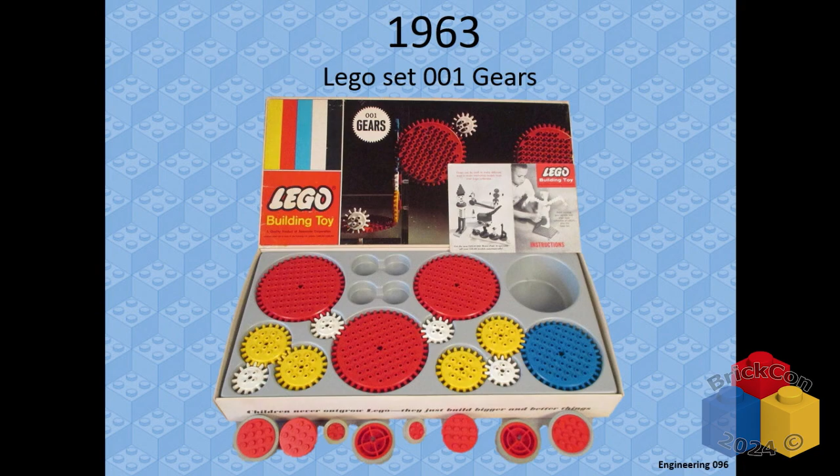Gears have been around in Lego form since '63. The big sprocket ones, those are kind of fun. And in '77, that's when Lego came out with what we now call Technic. That's when we got the 8-tooth, the 24-tooth, and the 40-tooth gear. More on those later, but they've been around since the '70s, okay?

Some of you have been around since the '70s. Yes, there we go, excellent. So I do remember when these kinds of things came out when I was a kid, and that was kind of cool.

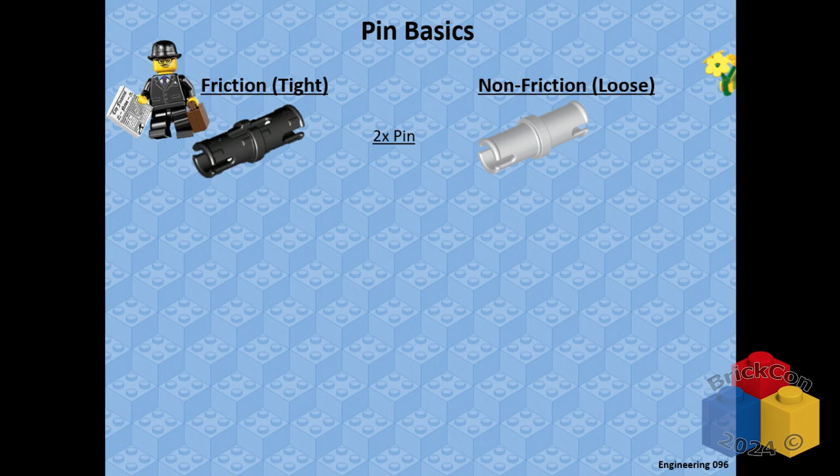So pin basics, real simple. If Technic is not your area, there's friction pins - they're a little bit tight-wound. And there's the non-friction pins, which are really kind of loosey-goosey. They are different. I didn't learn this till I was in my 40s - I always thought they were the same, just different colors.

Working with gears, the ones that are a little more helpful are the combination pins, where it's half axle, half pin. Sometimes you need to connect a gear to something, but only to the Technic beam. The non-friction tan ones are very convenient for that because they spin nice and loose. Sometimes you need to introduce a little more resistance in a mechanism, and the blue ones can be nice because they'll still attach to the gear, go into the pins or the beams with the pin connection, and have a little bit of resistance and friction. Just a little tip there.

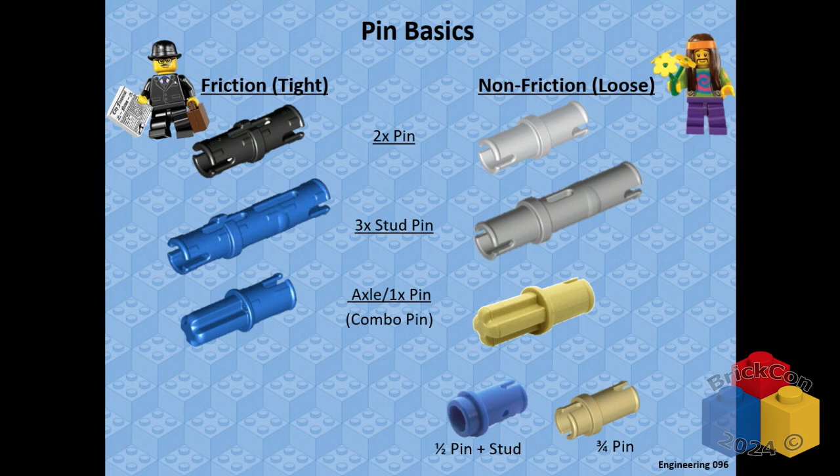There's more pin types if you don't know them, even more than this, but basically think of friction and non-friction. The friction ones are all black and blue. The non-friction ones are all tan and gray. They also have red and yellow that they're introducing, which is frustrating because I learned these colors, but they do still follow the friction non-friction rule.

In general, simple machines - this is the core alphabet of all mechanical engineering. If you don't know these 6 simple machines, find a resource to help understand them. Great YouTube videos out there, little tutorials and things. This is great for understanding how machines work. The basic concept is changing magnitude or direction of a force - make something go a different way, or at a different speed or force. There's lots of math you can do with these things, but that's not why we're here. So we're going to just focus on the fact that they're cute little things and they do stuff. Exactly, okay?

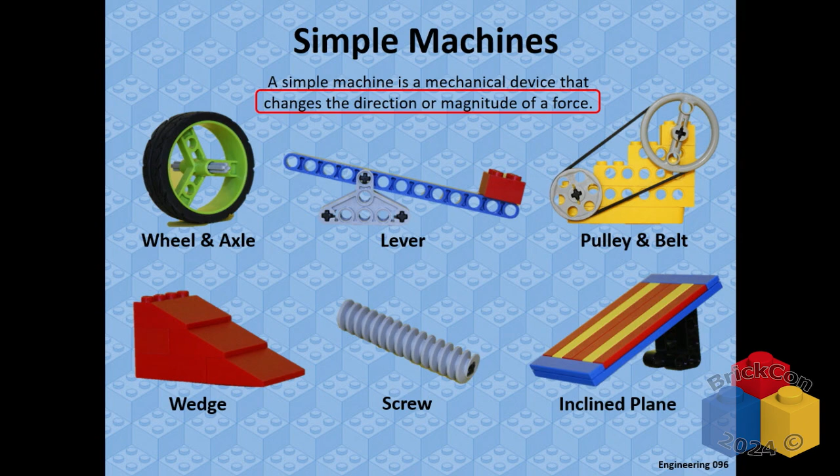So simple machines, get to know them. Maybe that's a talk for another day. Any kind of simple machines combined together make a more complex machine, like a gear. A gear is not a simple machine, it's more complex. It's got more functions in it, and we're going to use those to do stuff.

Okay? There you go. You just passed 096. On to 101. That's good.

All right, gear basics, just learning about gears. You never touched them before. You don't know what they are. You find them in the bulk bins. You're like, it's weird. Got to have a proper mesh.

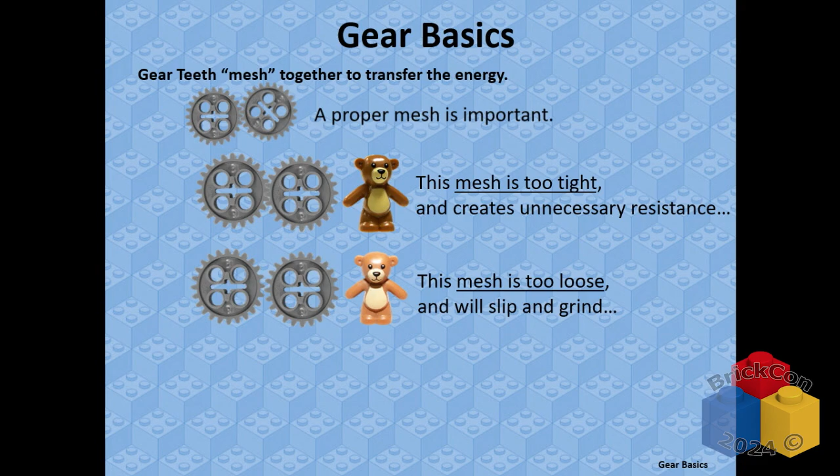When they mesh together, the teeth of the gears really need to fit properly. Can't tell you how much I see with, do you not fit properly sometimes? Does it not mesh right for you sometimes? Okay, I'm sorry, that's a personal issue. We'll talk about that later. It's okay. So make sure they're not too tight, make sure they're not too loose. They got to fit just right. That's kind of cool.

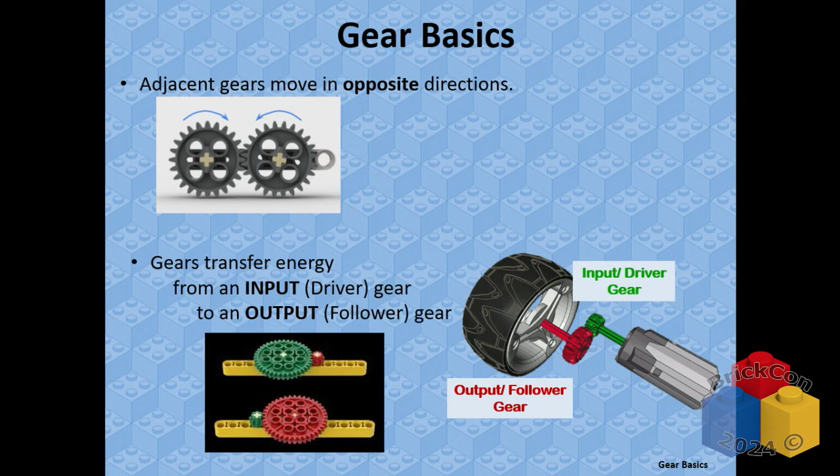So 2 gears working together turn in opposite directions. It seems pretty logical, but sometimes we forget that. You build a thing, you hook it up, you turn it on, it's like, why is it going backwards? Well, because you got 2 gears. Okay, that's okay. Maybe make the first one go the other way, and the other one will go the other way.

That's all right. Gears always have an input gear or a driver gear. That's where the thing is going in, you're starting the force there. It connects to an output gear where it's going off to do something else. Input and output, first, second, driver gear and follower gear. Different terms, but input, output. Easy enough, I hope. Okay.

Gear basics. Any time you want to put a gear between gears, you can do that. You still have an input, you still have an output, but you can put some gears between them. If you need to space them farther apart, maybe they're getting too comfy, or farther apart, those are called idler gears. The idler gears space things out. One idler gear will reverse the direction, so now the input and output will go the same direction. But if you put two idler gears, now they're going to go back to opposite directions again. You can put a whole bunch of idler gears together and it creates a gear train, just have a whole bunch of them. So you can do that to space things out.

Using smaller idler gears can create some resistance and friction. Using larger ones gets you farther spacing and makes it a little bit smoother. Depends on the machine you're working with, but idler gears can be your friend to move things farther apart. Okay? Idler gears do not affect gear ratios, which we'll talk about shortly. Don't freak out on that word right there that you heard back in middle school. That's okay. But they do not affect the gear ratio, just the input and the output.

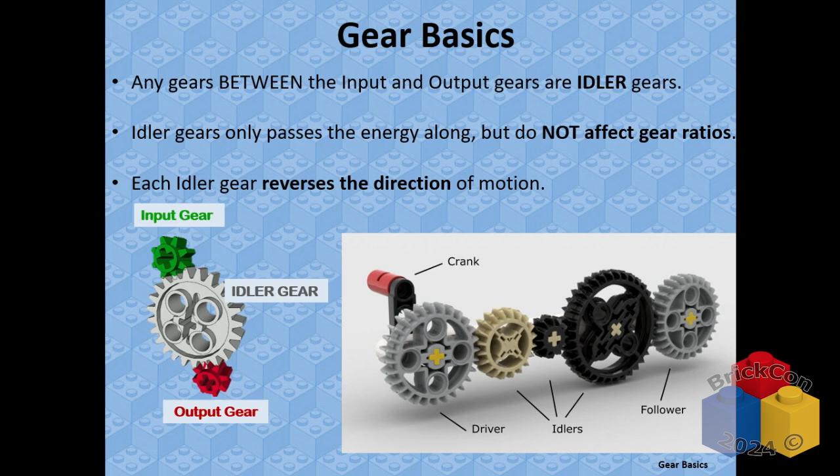Okay, all right, on to gear types. Gear pairings. Again, I'm going to go through this quick, and then we're going to get to the more meaty stuff, hopefully. If you're using gears and you want the axles to be in parallel with each other, cool. Then you got gears that are just meshing side by side, sitting right there. That's an easy one, and these are those gears.

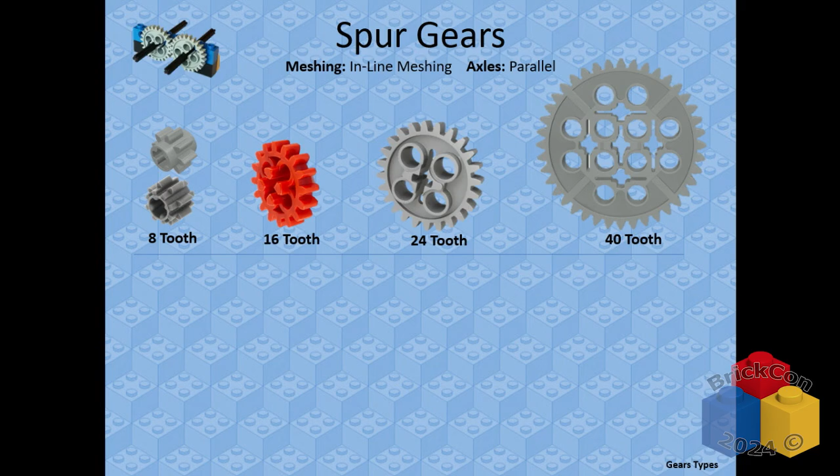They're called spur gears. You know, spurs like a cowboy. Yeehaw, giddy up, little cowboy. And these are the ones. You got an 8-tooth, 16-tooth, 24-tooth, 40-tooth. That's it, those are your spur gears. That's easy. Seem easy? Freak anybody out yet?

You don't even want to answer because you're freaked out. Okay, so I'll just move on.

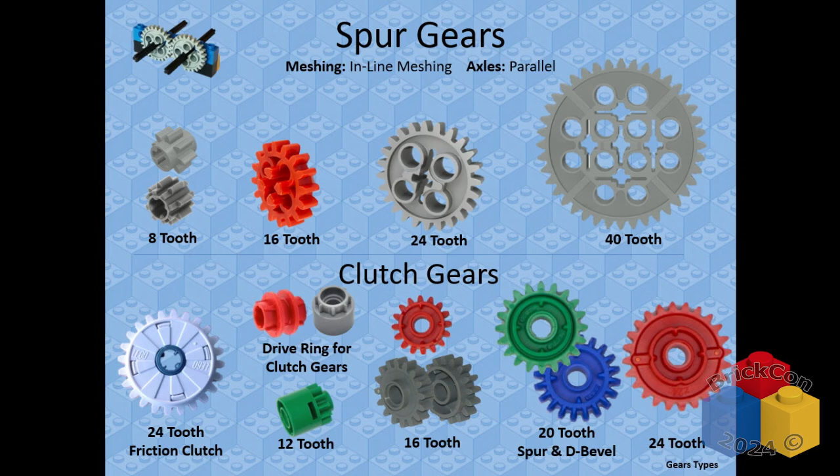So if you want, clutch gears are kind of cool. The white one on the end is an older one, but it's still out there. The center axle hole can move independent of the outside. So if you put an axle in the middle, connect a gear to it, there's enough resistance in there that it will turn. But if one side, the inside or the outside, jams up or slows down or encounters too much resistance, the center one can spin independent of the outside one, so it slips like a clutch. That's why they're called clutch gears.

All of the other ones up here are more for like transmission drives, like in some of the really fancy Technic cars and things. And you actually want to do a gear transmission where you might have one gear that's spinning constantly, and then you want to take this other gear and move it over and engage it and make it start turning, or shift it to another gear that engages with it and starts moving. Okay? So clutch gears, good for moving and making transmissions.

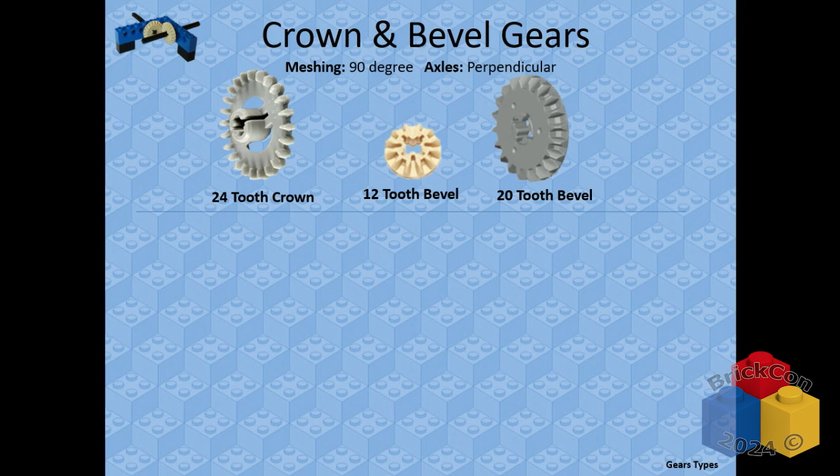Changing axle direction, going perpendicular. Maybe your motor is connected to something this way, but you want something to go in a different direction. We can do that with a different type of gear that'll change directions - crown gears, beveled gears - to change axle directions and go perpendicular, around a corner or something.

Double beveled gears are beveled on both sides. Bevel just means instead of the gears meshing straight on, one of them is cut off and meshes around the corner, going on the side. The double beveled ones can mesh on both sides, but they can also mesh in line, like the spur gears. So you can go straight, or you can go beveled.

My friend Kyle Keller showed me that you can even put them on a 45-degree angle. It gets really weird - don't. No, it's really cool, but it's kind of challenging.

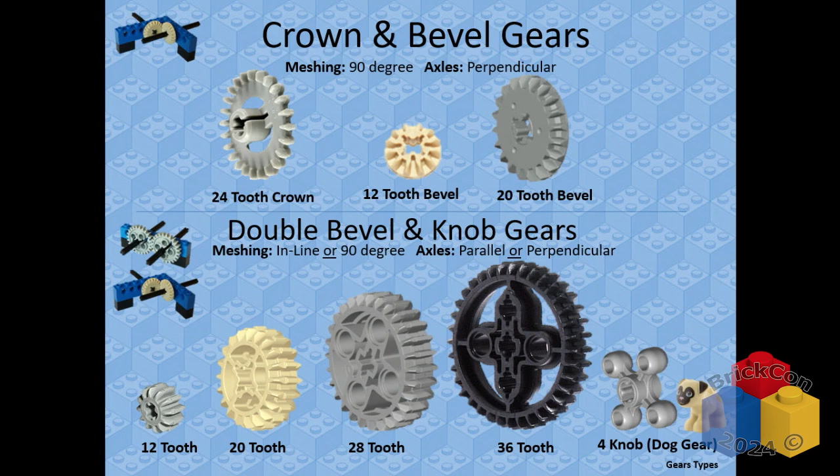The little wheel one at the end, the knob gear, the dog gear, does the same kind of thing - inline, 45, or 90-degree meshing. So there's all the basic gears, and gear sizes right there - 8 different sizes of gears of 3 different types. Pretty straightforward?

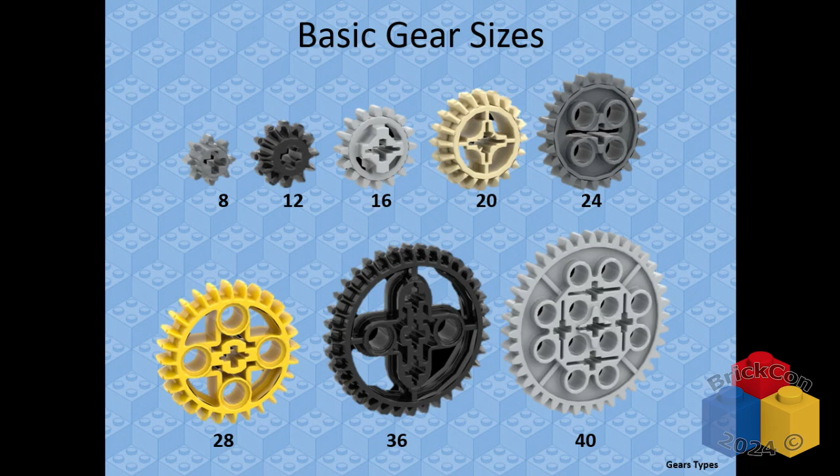You remember those all? No, I don't remember. It took me like 3 years to start to remember the numbers and things. If you don't remember the numbers, don't worry about it - there's resources you can figure it out, or you can just sit there and count them. Each tooth is a gear. It's pretty easy, pretty cool. But knowing the numbers eventually helps do some more advanced functionality with it.

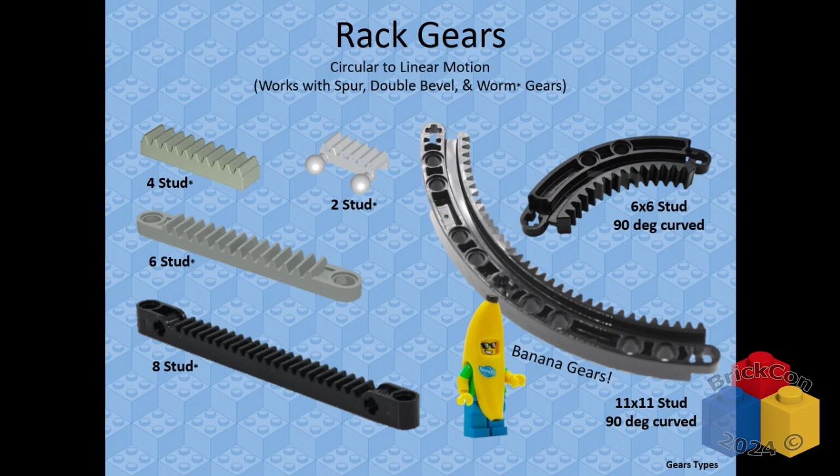Rack gears are a different type of gear - they're not round, they're linear, flat, straight. Good for going in a straight line, making linear motion. You can take a round gear, connect it to a linear gear, and go back and forth.

The banana gears, the big curved gears, are totally cool. You can make a complete circle, or use them as a quarter circle, half circle, or 3/4 circle. But they're curved on the inside - a little bit different there.

Worm gear is one of my favorite gears. It's a one-tooth gear - all it's got is one tooth. But it's really great for slowing things down, giving a lot of torque, which we'll talk about shortly.

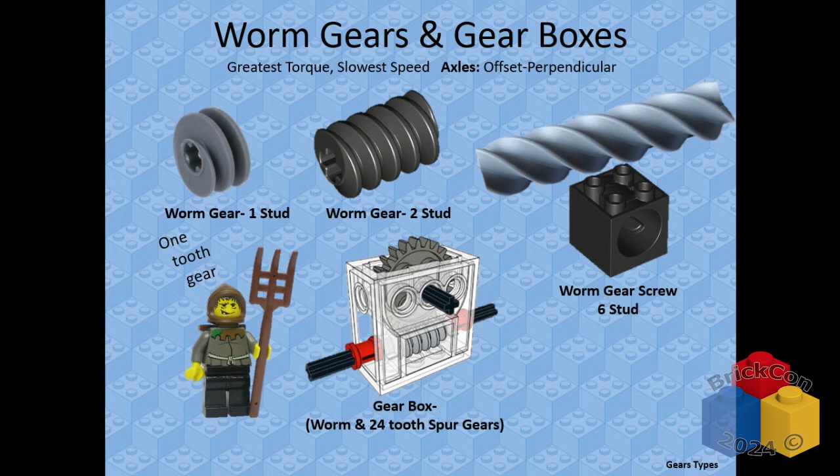There's this little clear gearbox, comes in other colors, that works with the worm gear and the 24-tooth spur gear. It just fits in there and works. You can use Lego pieces of other types to make that same connection so those gears work together, or there's just a piece that kind of does it for you. Both are okay, no judgment there. And they're still available - you can actually get them on Pick-a-Brick through Lego right now, for like $1 or something.

The new worm gear screw - who's seen that or played with that? Isn't it cool? It's so awesome. It just doesn't work with any of the other gears - it's its own weird system. There's a couple weird things I've seen people say, like 'no, you can kind of make it work with this other one,' but not really. I've not seen it functionally used with other gear systems. So it's its own little thing, and I'm going to leave it out there as its own little thing. If you want to prove me wrong and show me it's been done, cool, I'd love to learn that, because I'm still learning stuff too. And it's a newer piece - that's cool.

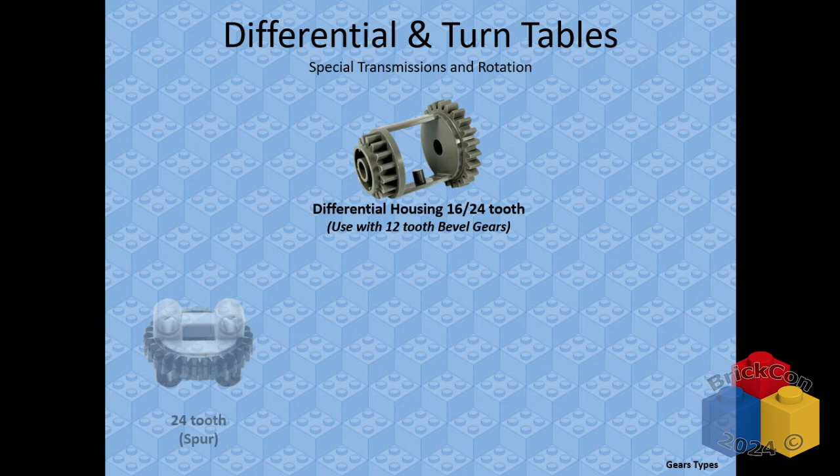Differentials come in all shapes and sizes through the era. If you're doing a car and transmission and you want the back wheels to turn faster than the other, differential, he's your friend. It could also be used in other mechanical things. It's a much more advanced engineering topic that I don't want to get into today, but I want you to know what's out there.

The turntables - the inside spins separate from the outside. That's pretty easy, and you can hook a gear to those to make them go.

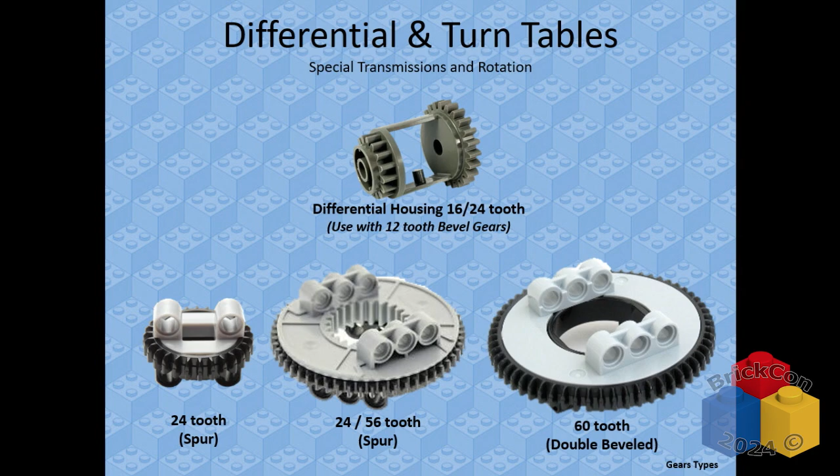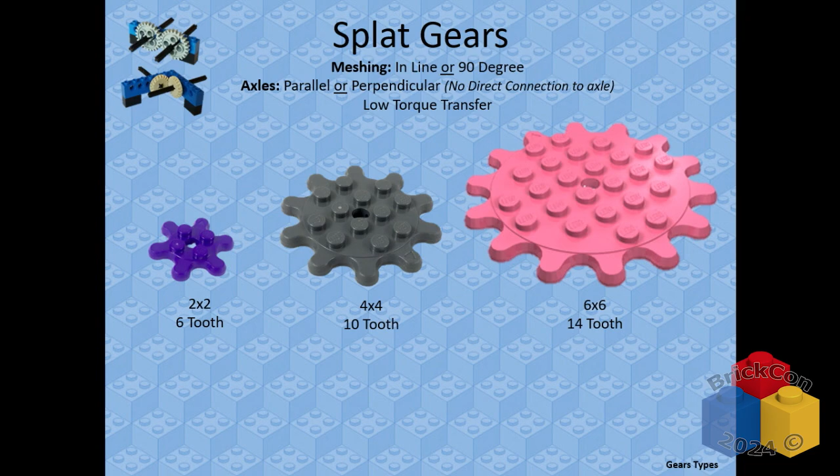Somebody nodded. If you want to use the double bevel gears, all the double bevel gears work together. Very cool. But you can also use the regular bevel gears, and you can use the crown gears, and you can use the spur gears, and you can use the rack gears. Okay, that's kind of cool.

If you want to use the worm gear, it has to be the input gear, it cannot be the output gear. It's a one-direction connection. You drive the worm gear with like a motor or something, and then it makes another gear move. But you can't go the other way. You can't turn the 40-tooth gear and make the worm gear go. It won't work. Mechanically, it just doesn't work that way. So worm gears, one direction only.

And they only work with these guys. They don't work with the banana gears, even though they're in my circle. I don't know, I got lazy, I didn't want too many circles. So don't use them with the banana gears. It's curved and the thing's not, and it gets really funky and weird. Okay? And of course, the knob gears and the splat gears work together as well.

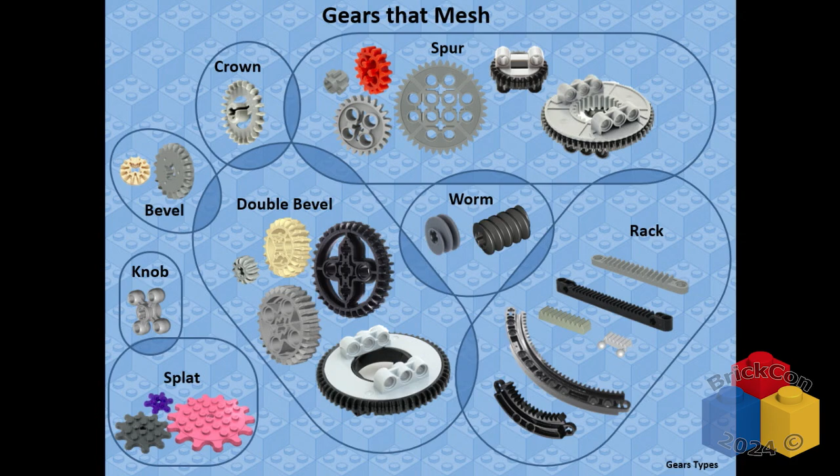All right, so that's gears. Speed versus torque. Does that scare anybody? Some people say no, some people say yes. So speed is obviously something moving at a quick rate. Torque is a twisting force. If you reach out and grab a doorknob and twist, that's a twisting force, okay? Something that twists, how much twisting force is there in there, that's torque.

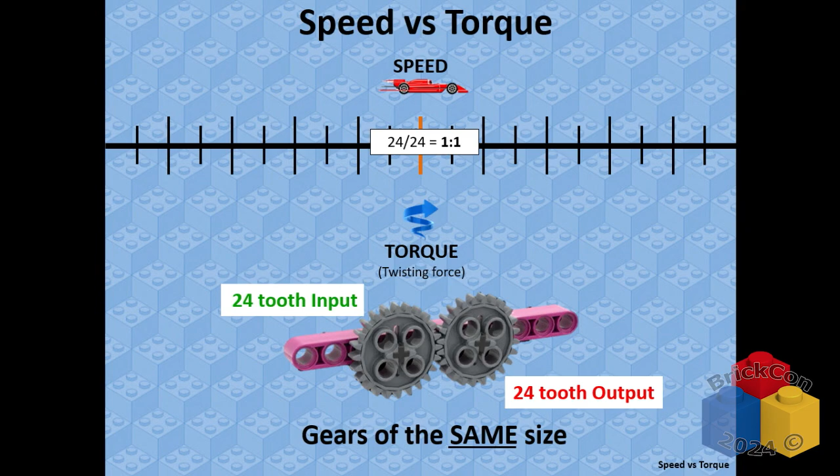So if we have two gears working in a simple system, and the two gears happen to be the same size, like these two 24-tooth gears - got a 24-tooth gear input, got a 24-tooth gear output - every time the input gear turns one time in a circle, how many teeth went around? 24, for the half of you that understood that. That's good. And that means it's going to push on the output gear 24 teeth, so it's also going to go in a circle one time. So they're going to turn around a circle at the same time, at the same speed, with the same amount of torque. It's a balanced system.

If it was an 8-tooth gear to an 8-tooth gear, they would both turn at the same speed with the same torque. 40-tooth gears would turn at the same speed, at the same rate, at the same torque. Same size, same input, same output, same speed, same torque.

But the beauty of the gears is when we change one of them. So if the input gear is a little bit bigger, like a 40-tooth, and the output gear is still a 24-tooth, the input gear is going to turn, 40 teeth go around.

How many teeth does it have to push on the output? 40 teeth have to be moved, but there's only 24 teeth there. So it has to go around and a little bit more. It's like, okay, hold on, I gotta catch up to you. Hold on, 40 tooth gear, I'm not there yet. So it's gotta go a little bit faster.

When that happens, speed and torque are inverse opposites. So if speed goes up, torque goes down by the same inverse amount. If one goes up, the other goes down. So they're gonna move at the same rate. We're gonna gain a little bit of speed, but we're gonna lose a little bit of that torque. That make sense, everybody? Okay, good, I did something right. Coolness.

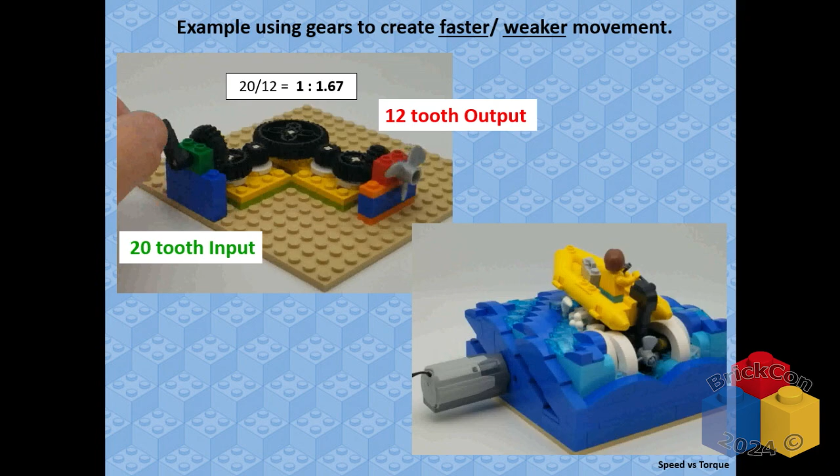Okay, yeah, okay, so here's an example. You probably saw this down there. I have this example down there. My little speedboat - I wanted a speedboat, so it had a really fast propeller. So I have an input gear. I have this hooked up to a motor down in the hall. A 20 tooth input gear, and a whole bunch of idler gears, a lot of idler gears.

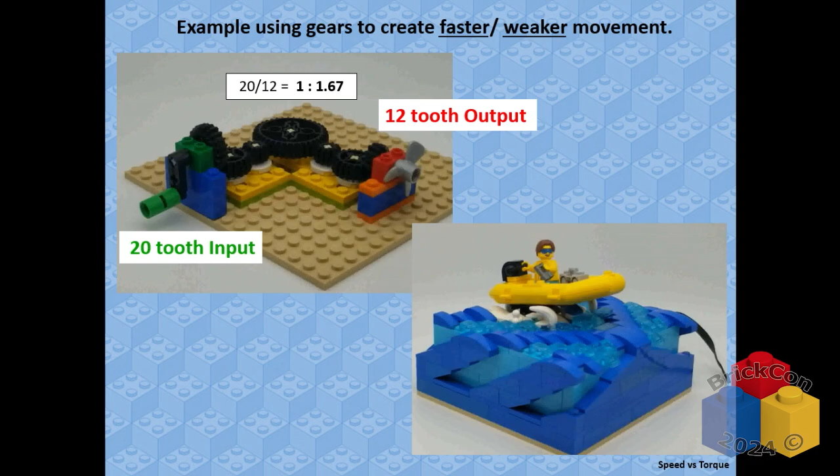How do I factor in the ratio of the idler gears? It doesn't matter, you ignore them. You ignore every single idler gear. You look at the input gear, the first one, and then you look at the output gear at the end. Because every time that input gear turns and pushes one tooth, that first idler gear is going to push one tooth, the next one's going to push one tooth, and so on until you get to the end. And the size of the final one, the output, that determines your gear ratio. Input, output, ignore the rest, they don't matter. So here we got a little bit of a gear ratio to increase the speed, to make it go a little bit faster.

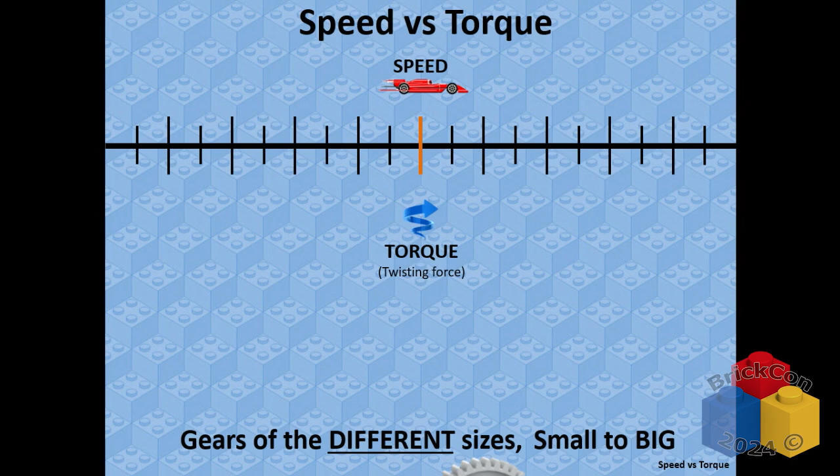That's cool. So, but what if we change it the other way? We're like, oh, I like that, Brandon, but I don't want that, I want the other thing. Okay, so we can go smaller gear pushing a bigger gear. Same concept, just in the other direction, because inverse opposites go the other way. So now I can get less speed because I want to slow it down. I don't want it to go fast, I want it to go slow. Take it slow, baby, take it slow. Can do that. Okay, it's going to have a lot more torque, though.

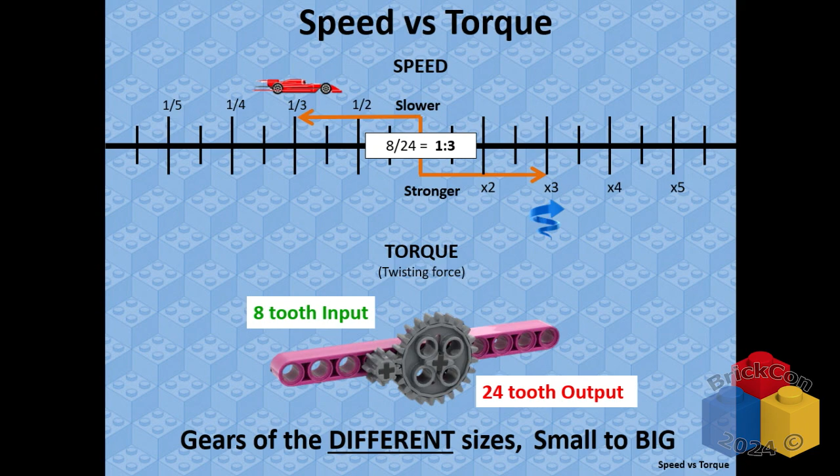Let's can do that. And if we go to an 8 tooth to a 24 tooth, okay, I got 3 times the torque, a lot more power. A lot slower, though. Okay, that could be cool.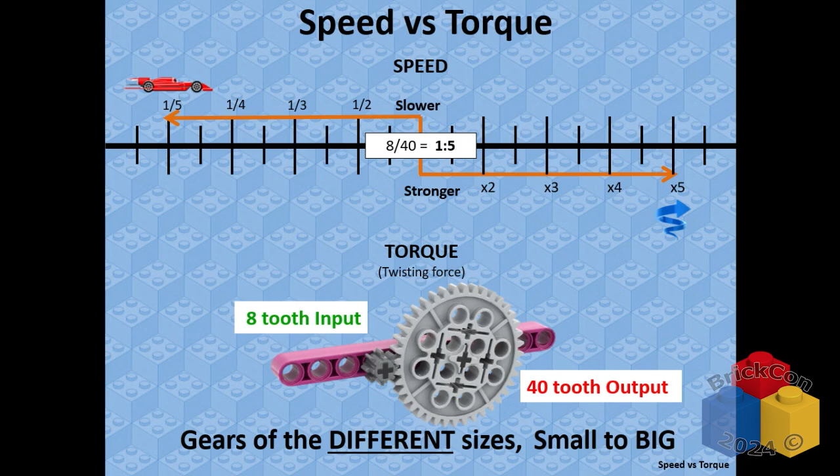And if I want to go from an 8 to a 40, then I've got - it's math. Do you see how the math is kind of working there? Remember, it's ratios, they taught you ratios at one point in school, I'm sure they did, okay? So we get 1/5 of the speed, but 5 times the torque. Maybe you want to lift a big bridge or move a big thing, okay, maybe you need a lot of torque. That's kind of cool. How does that feel for everybody? Not too bad? Some people are like, and some people are like, what?

I need to take this class again. Hopefully it'll be available for recording later.

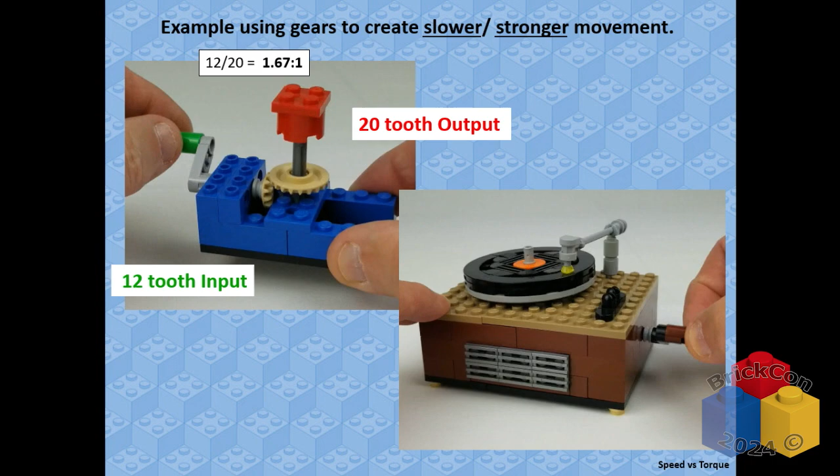So, an example of gearing something to go slower but stronger. Here I've got a 12 tooth input, 20 tooth output. It's not a lot of change, 1.67, not too bad, but it gives a little bit of difference there. And there's my little record player.

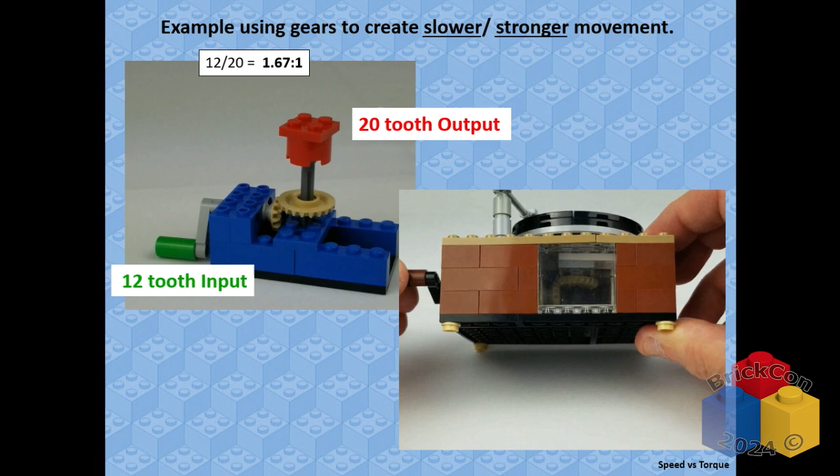Who saw the record player down there? Oh, somebody saw my stuff. I'm so honored. It's so cool, so cool. All right, let's move on.

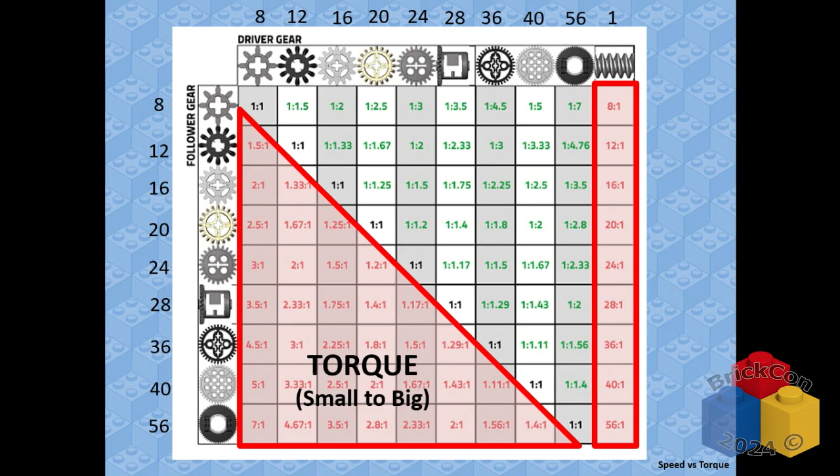And worm gears have to be which gear? Input. Got to be input, like, you guys are good at this. I love it. Okay, all right.

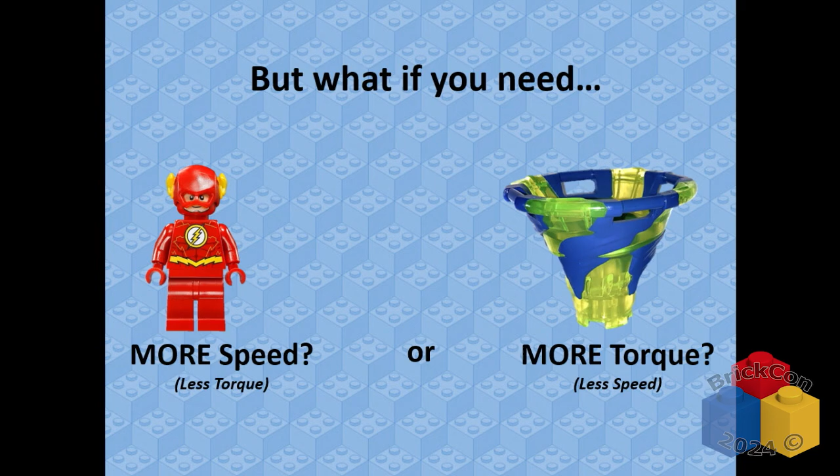But what if you want more speed or more torque? Tornado of creation there, for those of you Ninjago fans. Kind of, not really, I just figured it was something. So when you do compound gearing, who's ever done compound gearing before? Okay, you guys are good to go. No.

Okay, so compound gearing, not too complex, but it's like it sounds, compounding. We're going to do it. So we're going to do an 8 to a 40. Does that feel kind of comfortable now? And we get a 5 to 1, so we're going to get a little bit more torque, and we're going to go a lot slower. Really slowing this thing down by 1/5. You can say 5 times slower, or 1/5, I don't care.

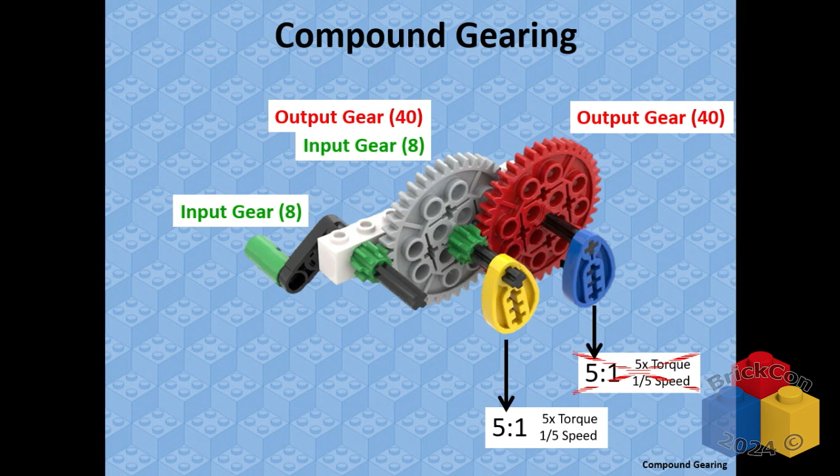But then on that output axle, the same axle that your output is at, you're going to add another gear, and that's going to become a new input gear. And that's going to go to a new output gear, which gives you another 5 to 1 ratio. That's kind of cool. But the total, the combined, from the first input to the last output, is not just 5 to 1.

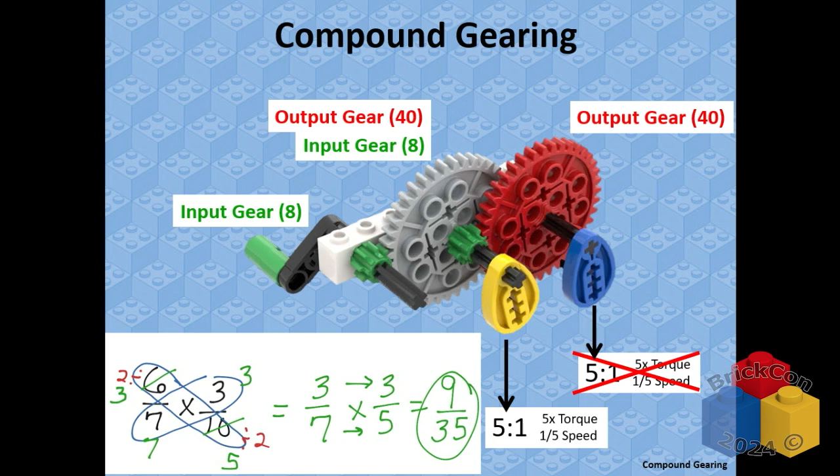You've got to do some math, they taught you this, right? How to take two things and divide, then cross over and do this, and then divide by the opposites, and then you remember that? Do you remember they showed you that? Yeah, it's 5 times 5 is really what it is. So 5 times 5, we get a 25 to 1 ratio.

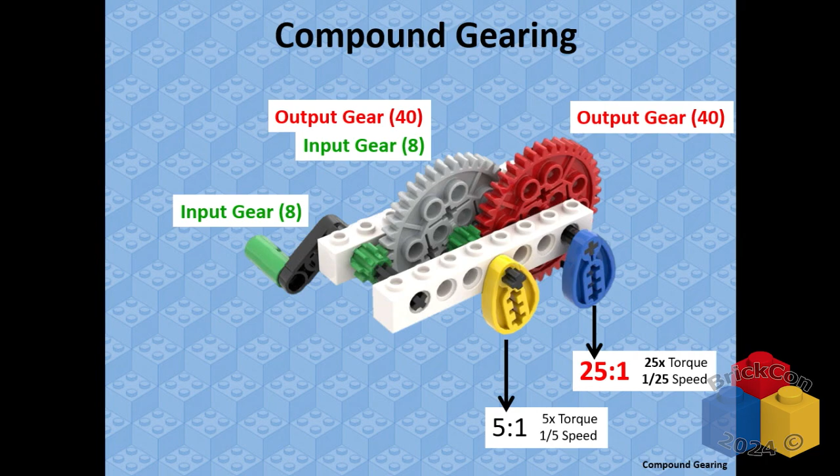So I did it once, I did it twice, I compounded it. I now have something that's going to go 1/25th the speed, or 25 times slower. It's going to be very, very slow, but it's 25 times stronger than whatever my input was. That's a lot more torque. You can start twisting axles at this. I've done that, I've taken axles and twisted them 180 degrees against themselves. They're really cool, but not fun for the MOC, I tell you that.

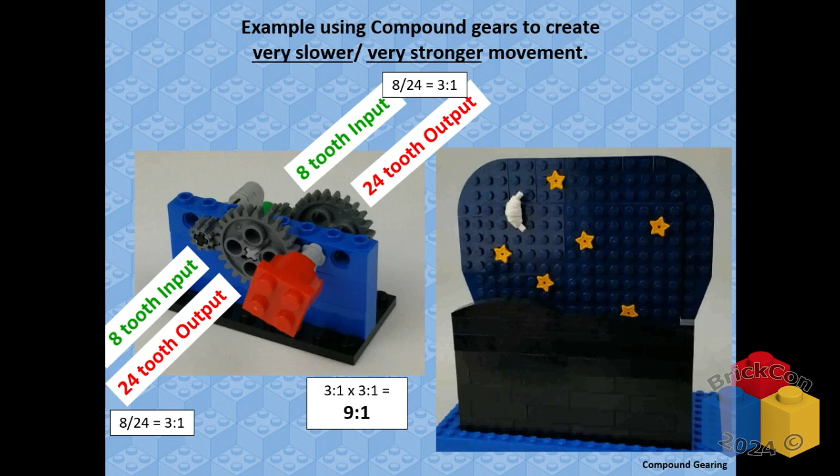Okay, so here's one where I did compound gearing, the little shooting star thing. Maybe you saw this down there. It's got an 8 to a 24, and then another 8 to another 24. So I got a 3 to 1 and a 3 to 1, 3 times 3, 9.

Okay, just move over this way. We'll just...

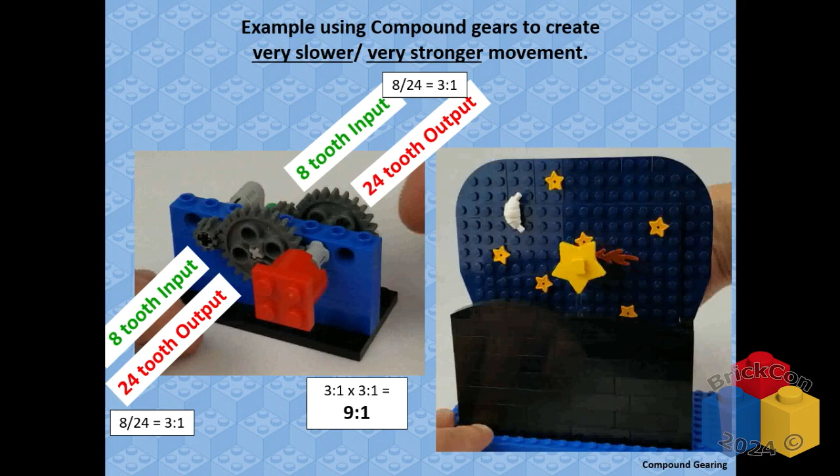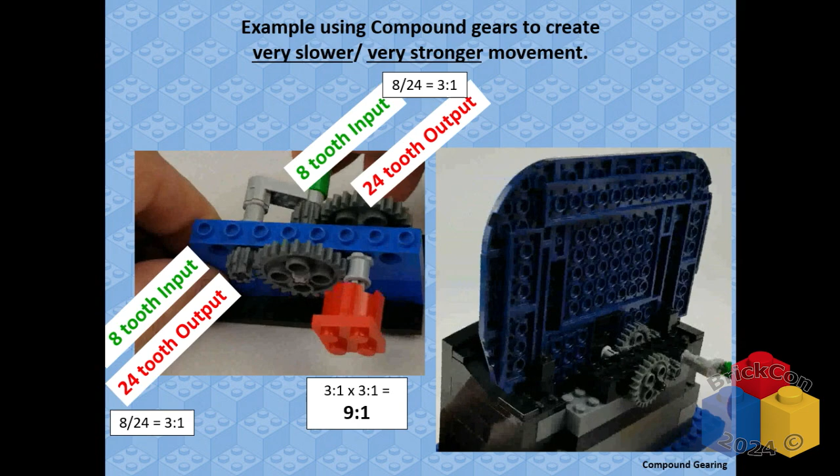Okay, so I get nice slow motion, really slow. Do I need a lot of torque here? It's a really light thing, there's almost no resistance to it. I don't need the torque, but I wanted it slow. I was able to slow it way down and give me the speed I wanted. And if it was not the right speed, I could change some of the gears around and combine them differently and get different stuff. Okay? This one uses the worm gear.

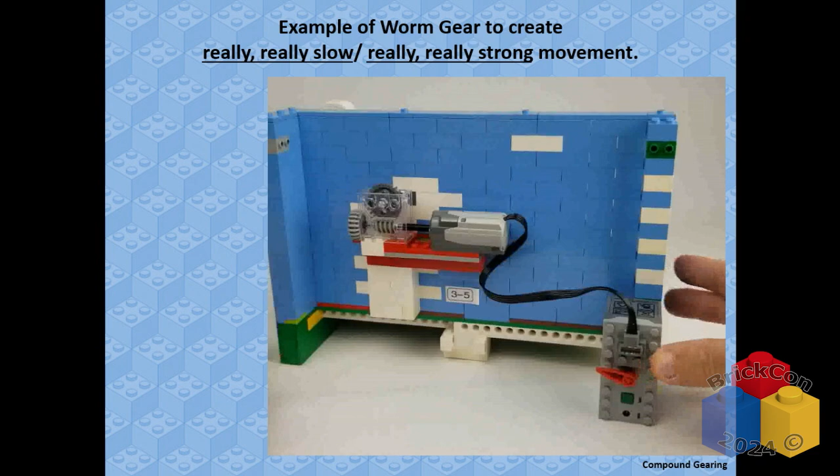So you've got a motor going into a gearbox. There's a worm gear at the bottom, and there's a gear on the end. Ignore that one—that's just there for manual control, so I can force it if I need to align it. But a 1-tooth gear to a 24-tooth gear gives a 24-to-1 gear ratio.

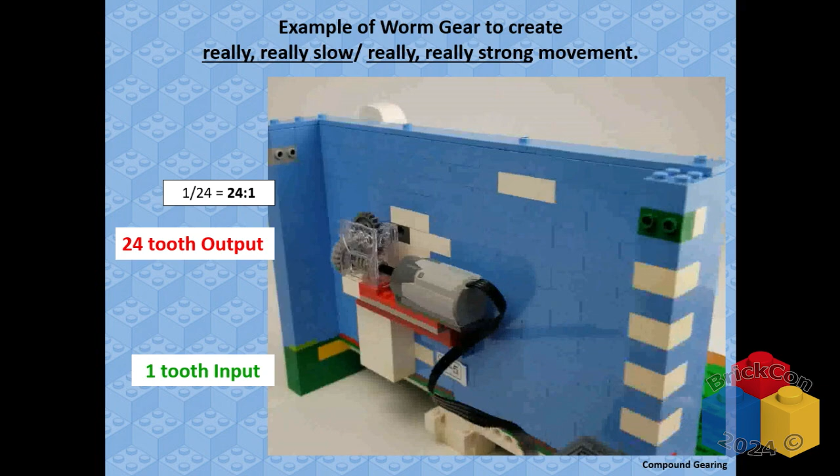Interesting. So it's going at 1/24th the speed with just 2 gears. The other way I compounded it, I was able to get 5 times 5, 25, 1/25th, or I can get a 24th—kind of a different way to do that.

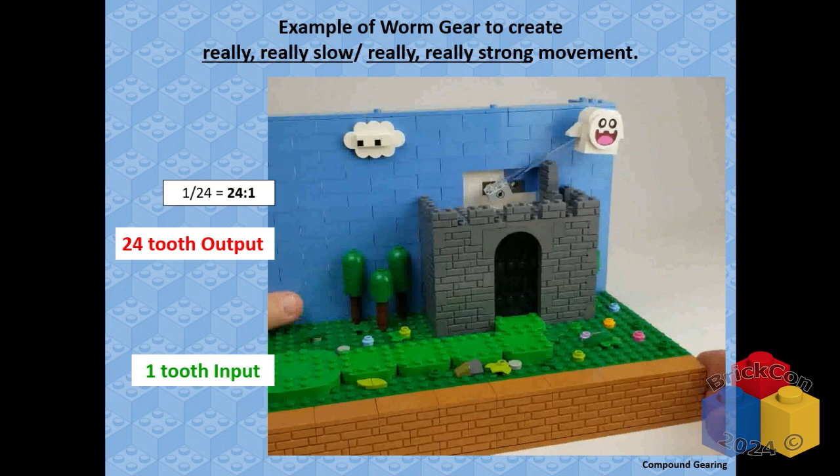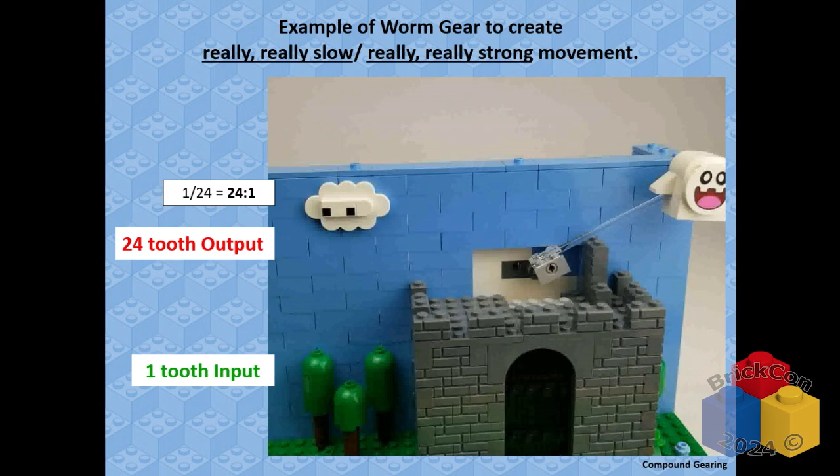And then on the output axle, I just put a little offset beam and attached a pin to it. So that pin in the 1x2 brick is going around a circle, correct? But it's going around the outside of a circle, which is eccentric or off-center motion. So I've got off-center motion, and I just attached a little beam to it, and it's just hanging out there and resting on a thing.

Oh, I'm sorry, they didn't like my talk. That's okay, get out of here. No—see you next year.

Yeah, so got a fun little motion there. Does that make sense? Okay, cool.

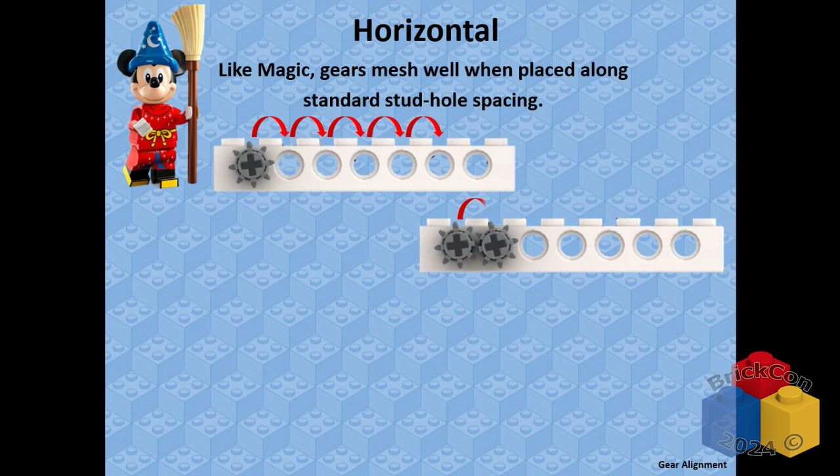Gear alignments—so when you take gears and put them in those little holes, you're familiar with those little holes? Most of you, some of you. Okay, good, technicals. So they fit in there with axles or pins or whatever we talked about, and they go next to each other, and the teeth magically mesh in the right alignment, right? Every time. But...

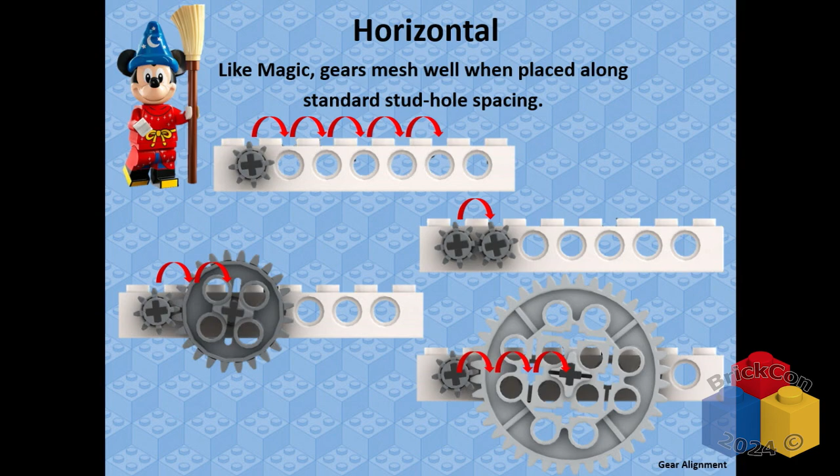Sometimes they don't mesh. Sometimes they're off by half, and you can't just move it over. You move it over one hole, it's too close. Move it over the other hole, it's too far away. They don't touch—they're cursed. But we have a way to fix that.

Lego's like, dun, dun, dun, dun. We have things that have holes that are halfway offset, or aligned with the studs instead of between the studs. Okay? We can do that with bricks, we can do that with Technic pieces. We can move over by half to make up that little bit of difference.

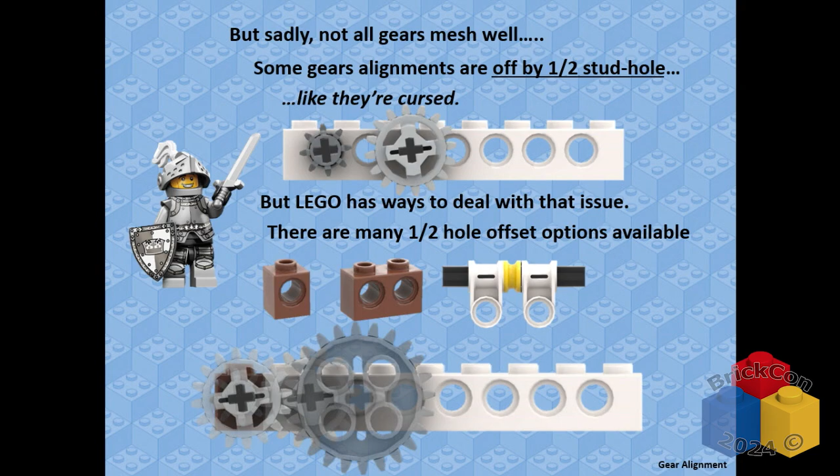Kind of cool, so there we go—now we have good meshing. We can do different sizes. Kind of cool. Anybody encountered that before, where you had to move something over a little bit? Oh yeah, we know we have. We know we have—that's good.

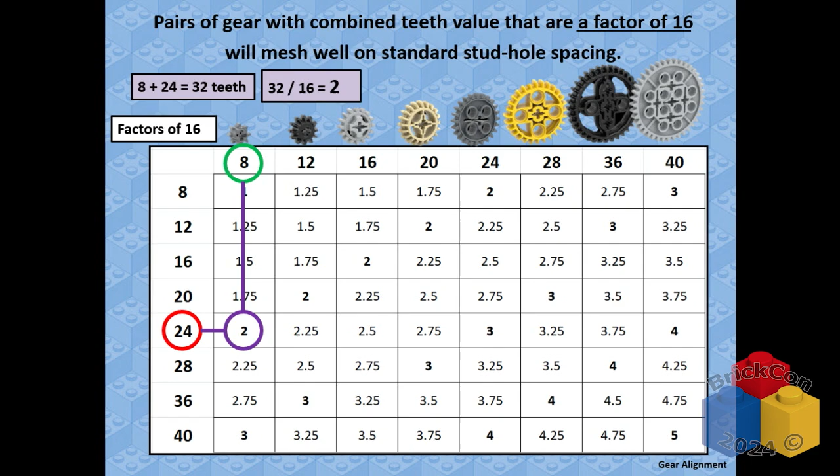Okay, that's cool. So to help you with that, there's this easy-to-reference chart, right? So if you take an input gear and an output gear and add together the number of teeth, then find out how many multiples of 16 that is—well, 8 and 24, that's 32, that's a multiple of 2 16s. That means you need to move over just one extra hole, or 2 holes apart. So anything that's a solid multiple of 16s, they just fit—16, 32, 48, all the way up. They just fit, kind of easy.

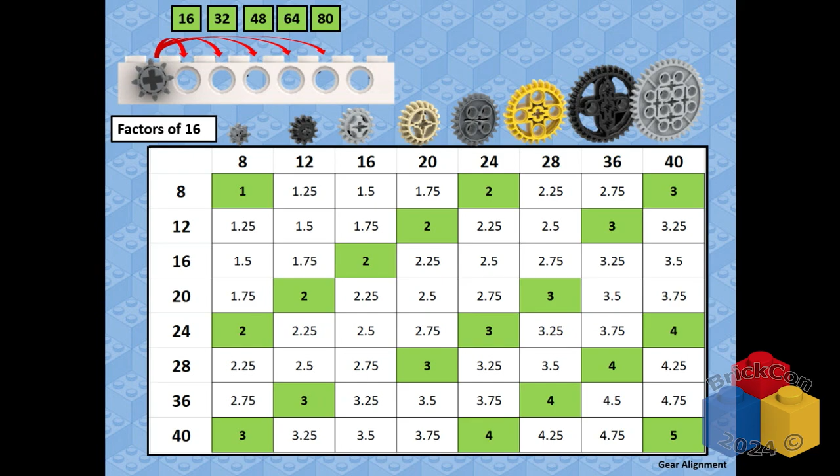Nobody likes to build this way though—nobody's digging in your bin going, 'oh let's see, I need to find me a multiple of 16 pair of gears over here so it'll fit into my axle. Oh yeah, these two, this is a multiple of 16, I know how to work with this.' But it's helpful if you start to do some of the calculations. You're like, 'why doesn't it fit?' Okay, we can figure that out, and I'll help you with that.

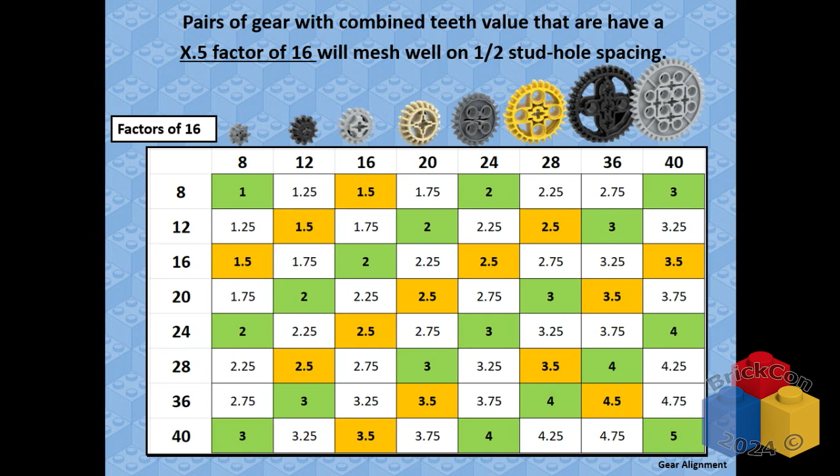Now, if you do your factors and figure out it's a half of a factor of 16—not quite a full factor, but a half factor, 16 and a half—then it's going to be off by one of those half measurements. You've got to move over half a stud. So not too far: 24, 40, 56, 72. If your teeth add up to those numbers, you're going to be off by a half. Is that confusing?

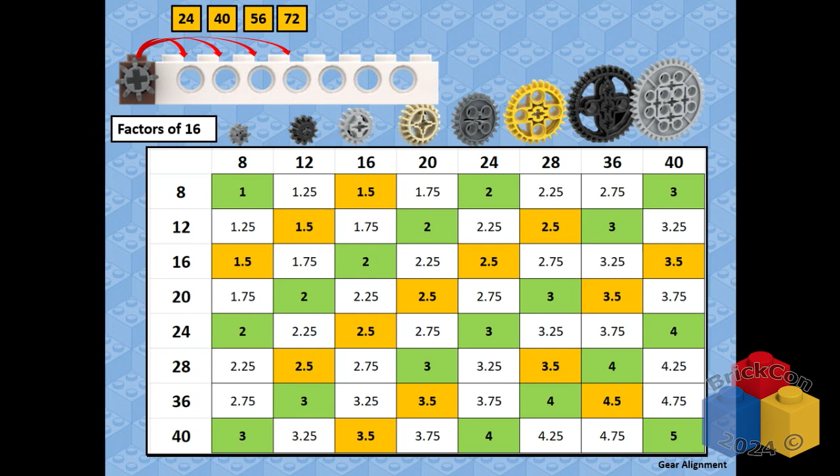Good, okay, don't worry too much about it. But if you do the numbers, add them all up, and it comes out as a quarter or 3/4 of a factor of 16, those don't mesh. Just don't even try, just don't do it. There's some ways it can be done, but don't hurt yourself unless you're really comfortable with it, okay?

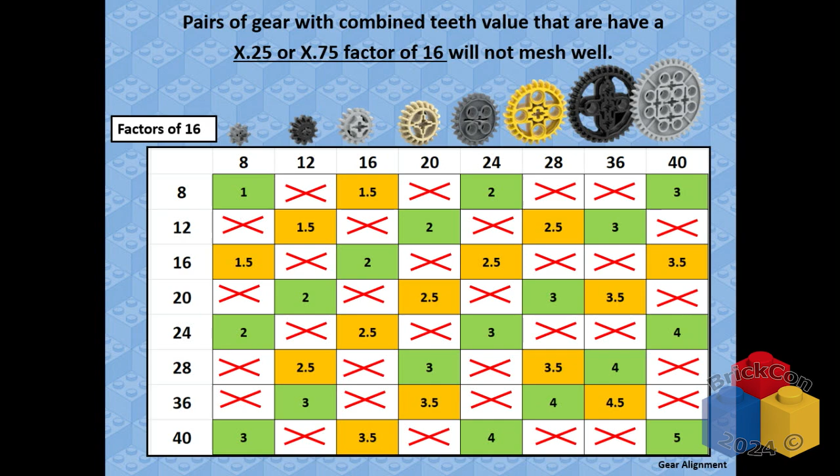So this little chart right here, again, I have this one—I'll leave it out so you can take a picture of it if you'd like, basically that chart without the X's. Or if you'd like it, I can email it to you, okay? If you're going vertically, just taking Technic bricks and stacking them on top of each other does not equal the same as it goes horizontally.

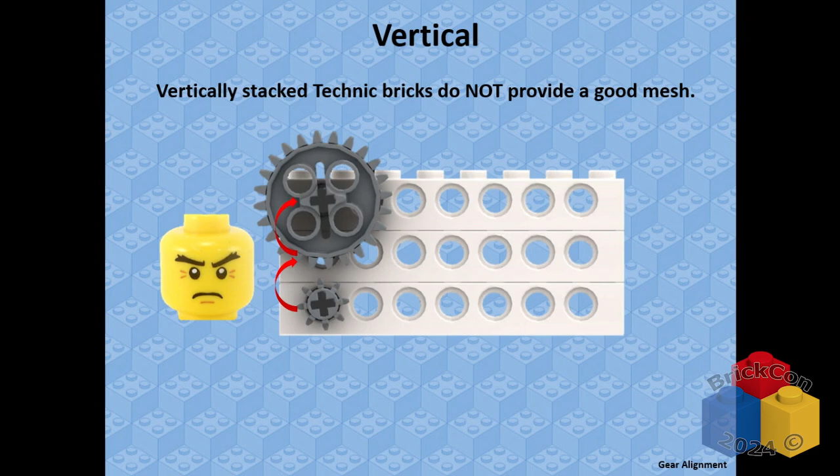Those don't mesh. Don't do that. That form, I will hunt you down. Okay, not really, sorry, edit that out. Okay, thank you, cool, okay.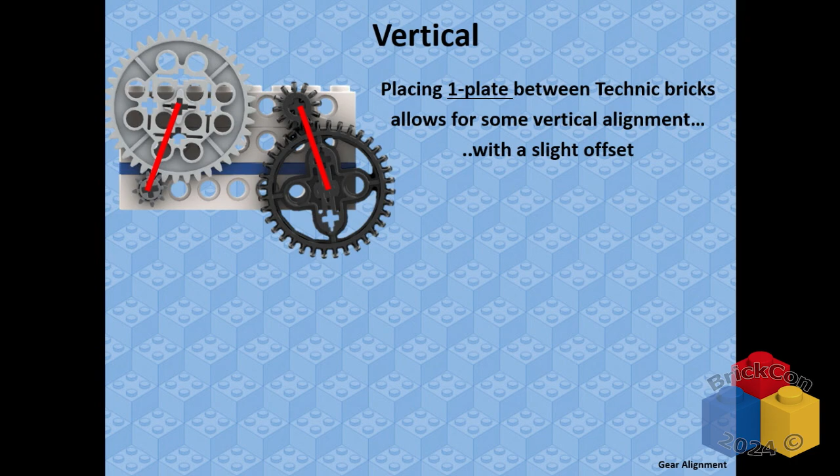But if you add one plate, you can get meshing where the gears are offset by 1 hole, or sometimes 2 holes, but they're offset a little bit, off to one side. So with 1 plate, that's kind of helpful. Certain gears will fit that way, certain gears won't.

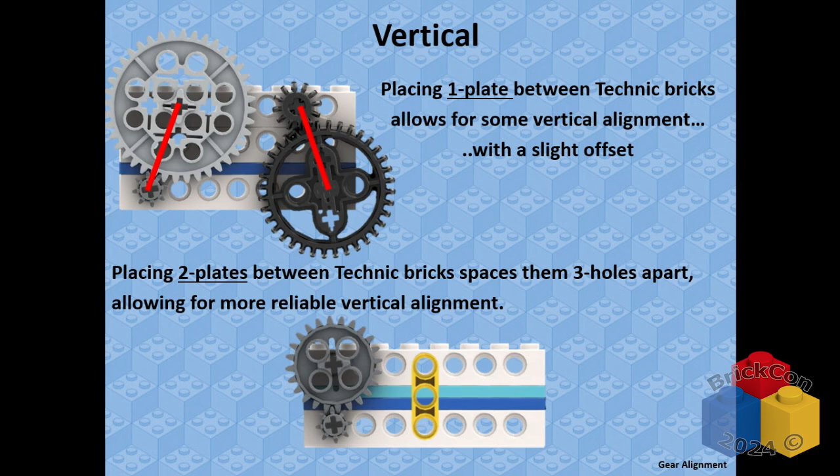It's all right. But if you had 2 plates between 2 Technic beams, the holes are 3 holes apart, which means it's now back onto standard spacing, which is a really nice technique. And you just get regular meshing. You can't mesh in that middle hole because there's 2 plates there. I don't know who stuck them there, but they're there. They're in your way, okay?

So whatever you want to do with any of your gears, do remember proper meshing is important. There's a lot of other resources out there that can show you some different combinations and different techniques, but that's sort of just generally where to start.

Go horizontally, great. If you go vertically, recognize it's going to be a little bit trickier. You might have to add a plate or 2, offset them to the side, one way or the other. They can fit. If you put them together and they're too tight, is that good? No. If they're too loose, no. Just right—make that happen.

Sound good? Okay, good. Nobody's learned anything yet. I'm feeling kind of bad.

Okay, design process—somebody asked me about this, so I thought, okay, I'll throw it in here. So how do I do this stuff? Well, we know that motors, assuming you're using a motor or a hand crank or some sort of an input device, is a circular motion.

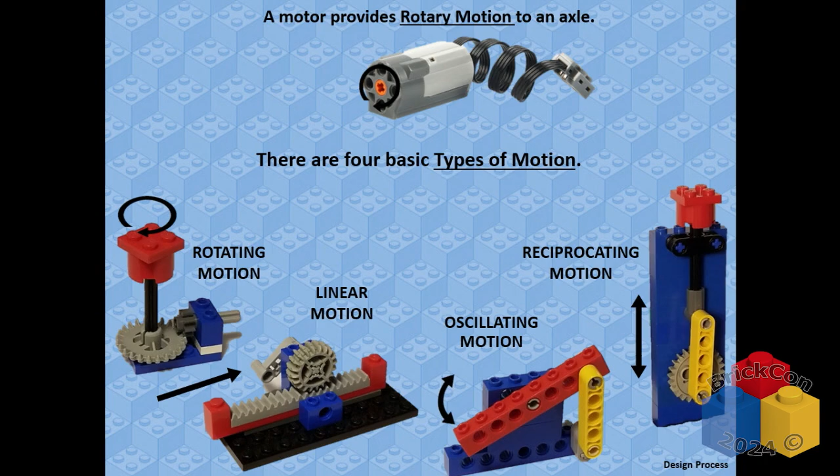In this type of engineering, we've got 4 types of motion that you can deal with. You can have more circular motion, but somewhere else. My motor's over here, but I want it over there, but I still want it to be going around. Maybe it's faster, maybe it's slower, maybe it's the other direction, but it's still going around. Okay, I want other rotary motion or circular motion.

I want something to go in a straight line—just linear motion, go that way, okay, we can figure that out. I want oscillating motion, swinging back and forth from a fixed point. You're swinging on an arc and you've got a fixed point. That's oscillating motion. Or going forward and back in a straight line, that's reciprocating motion.

If you're going to build something, think about what you want it to do. Know your type of motion—I want something that's go up and down, back and forth, swing this way, do that way. Know your type of motion, that's where you want to start. Okay, maybe you want to know what it is—is it a fish, is it an alien, is it a car—but what kind of motion is it going to go for?

Then, how are you going to get the energy or the motion from your motor or your input to where you want it to go? Well, you got to move the energy from one place to another place. So we got 5 different drive type options in the Lego world. Well, there's pneumatics, but I ain't doing pneumatics right now—you put that on the list, I'll do a talk on pneumatics.

So direct drive, just stick it on the motor and make it spin. Well, we're doing gears, and that doesn't really require a gear because it's just going to spin. Okay, that's just direct, that's easy. But you can use gears—we just talked about that, using gears to connect together and mesh.

Or gears that go around a corner or 90 degrees, they mesh, and you change direction. You still don't remember that.

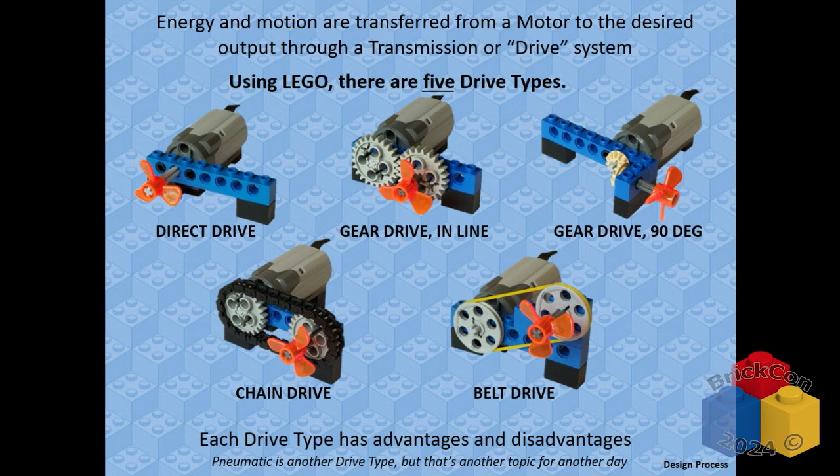It's a little more loose, a little more flexible. You do some different stuff with that sort of a drive system. Know how you're going to get the energy from one place to another. That's your drive. So that's the design engineering process.

This is something I teach in all my classes. This is something engineers and architects all over the world use. There's different levels of it, but I broke it down to this: identify the problem.

Brainstorm - no, you can read them, I don't have to read them to you. I hate that, people do that on PowerPoints. I may read to you what's on the slide, exactly word for word, so you understand it like I understand it. And you can read it for yourself. You're not that slow - well, some of you, but okay.

Identifying the problem: what's the limitations? What am I trying to achieve? What's my goal? Okay, that's cool. Maybe, what are my constraints? I only have these pieces. Okay, that's part of identifying the problem.

I don't have any motors, or I only have this type of motor. It can only be this big, maybe doing a build challenge - that's part of your problem. I want to make it do this - that's part of your problem. Brainstorm ideas: how are you going to come about it? Design it and plan it, et cetera.

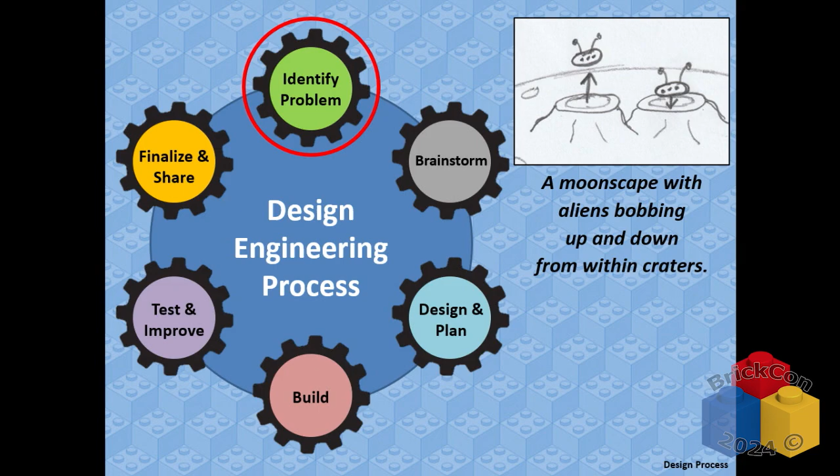So let's walk through this. Identify the problem: great, I want some sort of a moonscape that has aliens bobbing up and down out of some craters. That's my identify-the-problem step. Sound doable? Sounds kind of cool to add to a MOC somewhere, maybe like down in the hall, like I have already. Okay, I'll get there.

All right, I'm going to brainstorm some ideas. How can I do this? What's the scale - how big is this thing going to be? Well, I want it pretty small, so I'm going to make my craters maybe 2 by 2, and my aliens are going to fit within that, so they're going to be probably a 1 by 1, maybe even a Lego head size. That would fit in a 2 by 2 circle. Okay, so that's the size of my crater.

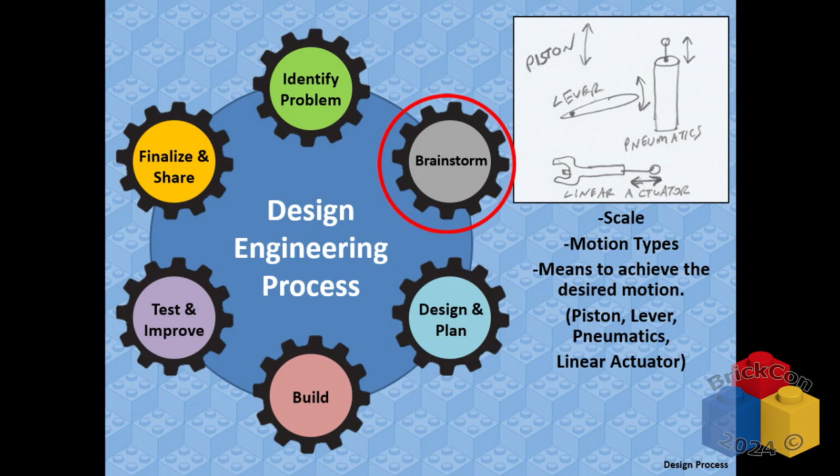That's my scale. What are my motion types? How can I make this thing move? Well, I could use pistons, I could use pneumatics - it would go up, it would go down, that'd be cool. I could use a lever mechanism - it would be oscillating, but maybe the alien kind of comes out in an arc. That could be kind of cool. I could use a linear actuator. Those are cool, I have a few of those stashed away somewhere. If you don't know what that is, Google it - it's a cool piece.

Okay, so I got some ideas. I brainstormed. When you're brainstorming, come up with more than one idea. Don't just go 'this is what I want and this is how I'm going to do it.' Come up with some ideas - well, I could do it this way, I could do it that way, I could do it this way. Brainstorm, think of some ideas.

Talk to your friends - some of you have those. Talk to your AFOLs here at the conventions, at your LUGs. Hey, I am thinking about doing this thing, do you have any ideas? Talk to Wayne - if you have an idea about how to do something like that, tell Wayne, I'm thinking about doing this thing, and Wayne will engineer the whole thing for you. He's beautiful. So, brainstorm some ideas.

There you go. Make a design plan. Sketch it out if you like sketching, build it in Stud.io if you want, do it with chewing gum and popsicle sticks - whatever you like. But make some kind of a plan so you know what you're doing. If you just do it all in your head, that can work, but an engineering process is more about the process, so you can go back and reference that and make changes later if you want to.

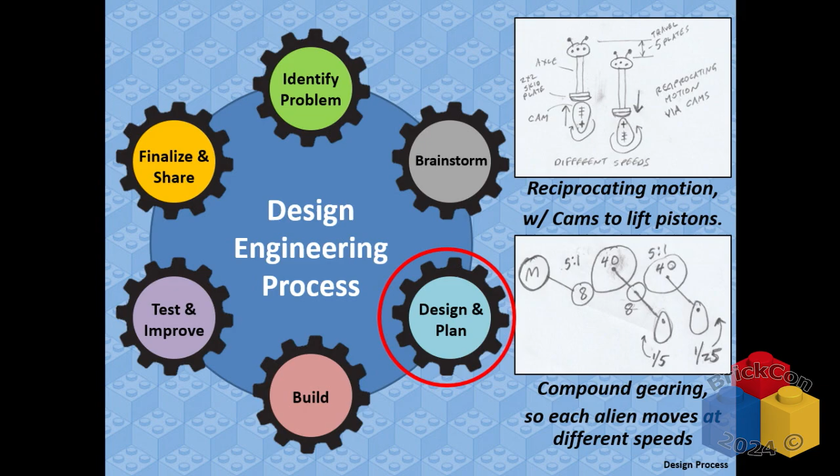So here I figured out I'm going to use some reciprocating motion, and I'm going to use some cams. I'm going to have something that turns with a cam on it that's going to push something up and down. That's going to be a piston that's going to make my aliens bob up and down. I want them to go pretty slow, but at different paces - one's going to go kind of fast, and one's going to bob more slowly, because that's kind of cool. So I'm going to use some compound gearing, and I'll have one alien on the 1-to-5 and one alien on the 1-to-25, so it'll be different speeds.

And build a little prototype, test it out. This is what I came up with. Here we go.

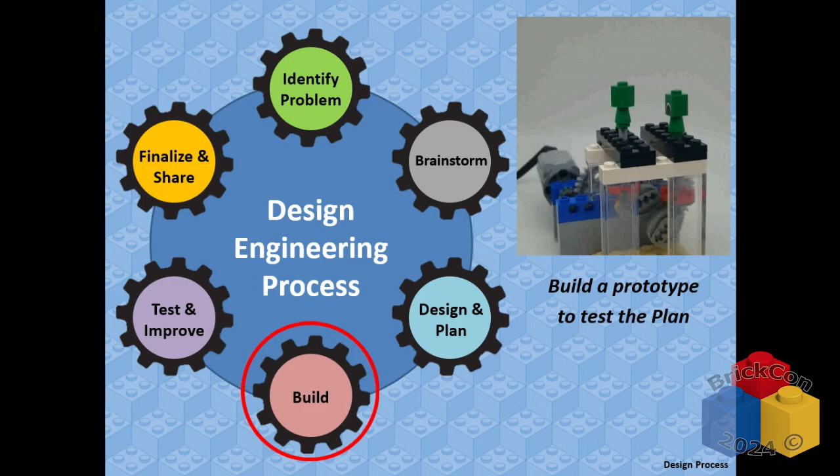How's that look? What do you notice about it? Or maybe you can't see it because it's too small.

They're turning around. Every time the piston comes up and pushes, on the bottom I have a 2x2 round skid plate, it pushes and it causes it to rotate a little bit. So it's not just going up and down, it's like woohoo, woohoo, woohoo. And I didn't want that. Maybe you like that kind of thing, but it's not my jam.

You know, for you, we'll hook up later. All right, that's good, that's good.

So I tested and I improved. I changed it. I put in some bricks and solid walls so it can't rotate. That's cool. And I changed from the skid plates to just a little 2x2 brick with a Technic hole in it that could go on the axle. So now it doesn't rotate.

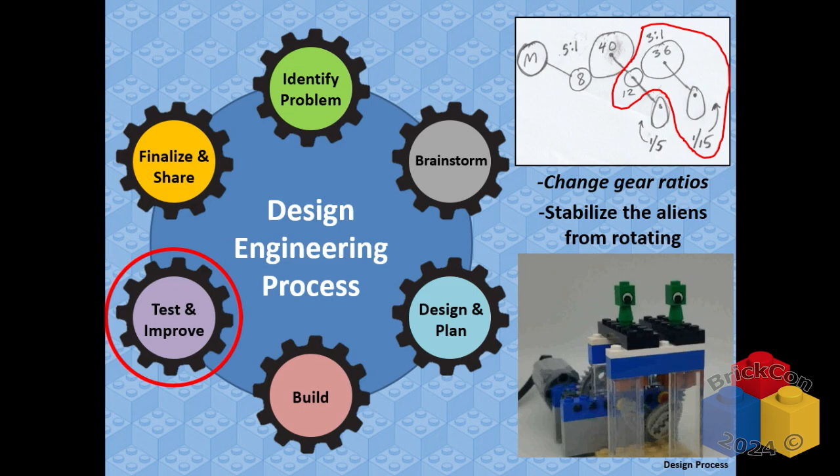And I decided I'm changing the gearing on the second compounding. It was too slow, the difference between the two was too much. So now the second one's a little bit faster, it's catching up a little bit. I balanced it out.

I tested, I improved, I changed it, all just in the prototype. And then I added some finishing decorations, some details, and put it on your flickers or whatevers, if you like. And there we go, that's what's down in the hall.

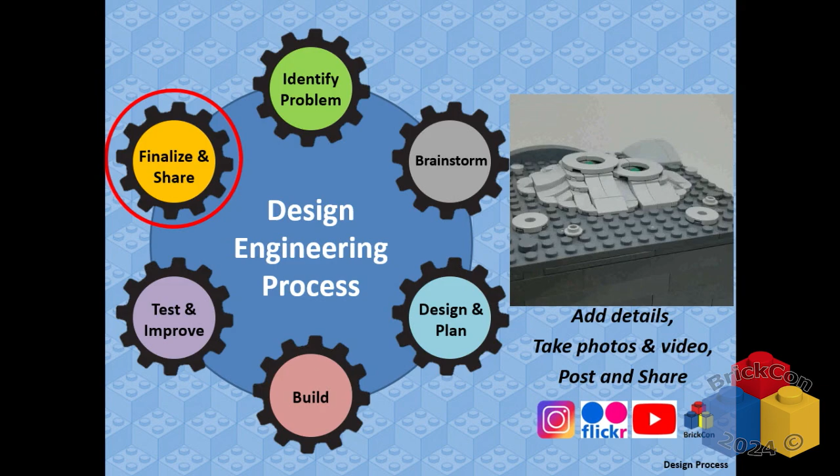So there's a design process. It's not scary, just one step at a time. What do I want? What are my limitations? How could I do it? Which way do I want to do it? Okay, let's try that. And if it doesn't work, go back to your brainstorming session. Well, what was one of the other ways I thought about? Maybe I'll try that, try a different way.

It's easy. It was not easy. It's not easy, it's painful sometimes, but it's a good process. That's kind of cool.

All right, power options, anybody do power? Oh okay cool, I got the 10-minute warning. Okay we're doing good, okay sweet. I saw it, which is good.

I'm very, very, very hooked on the power functions and the EV3. That's my babies right there. Everything else, meh.

But if you want to do programming and make something move with a specific intent or function that's controllable through sensors or through timing, or move this direction and then move the motor the other direction, you can do that through programming. You can do it mechanically as well with some gears, but you could also cheat a little bit and do programming, which is really nice.

My plasma ball, anybody seen the plasma ball down there? It's programmed to spin one direction at a random time, for a random amount of time, in a random direction, at a random speed with parameters. And then it shifts and it goes the other direction. When it changes direction, it has a quick burst of change in direction.

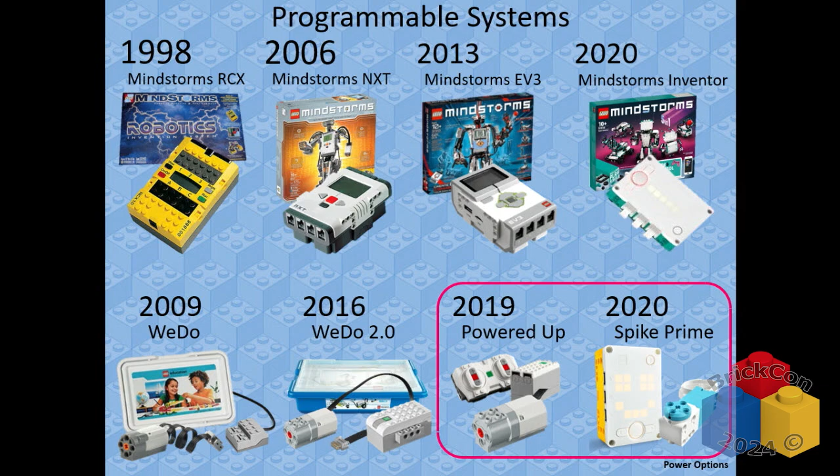Powered Up, I've never used the app, but I use the system with just battery, and you can turn it on and off. Or you can get an app on your phone and do some little programming on your tablet or whatever you use. Don't do it on your TV, that'd be weird, I don't know how that works.

Okay, so power options, pretty easy. I hope so, more knowledge. What else we got in here?

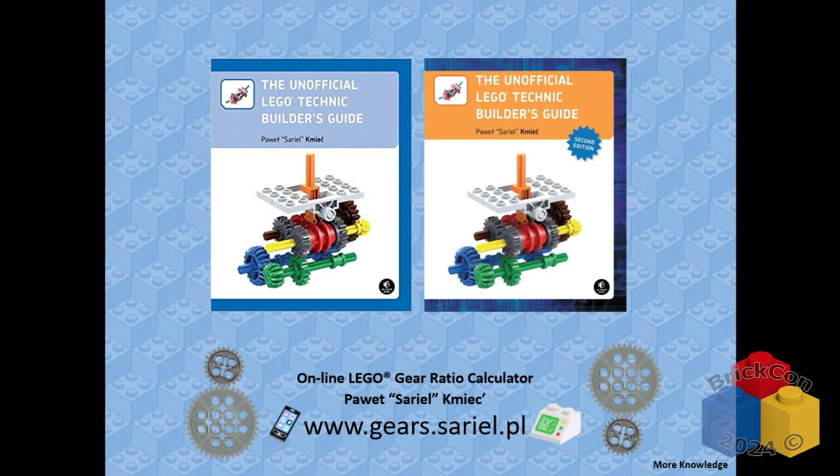Anybody seen this book? Oh man, it's like the gospel, I swear, it's good stuff. Sariel makes amazing things, does amazing books, and he's got a great website with lots of good resources. That chart that I showed you with all the gear ratios, it's on his chart, it's on his website, you can pull that off there. So that's easy to get to.

He's got some references online where it'll have an array of Technic holes. You're like, well, I want to use these two gears, where would they mesh? And it'll show you where they go. Or I want to use these two gears, what's my gear ratio? It'll do a little calculator and show you. Did find one little error in there that wasn't quite meshing right, but mostly it's a good reference. Build it before you test it.

All right, that's my talk. If you want to build some mechanisms, I have this one link, bit.ly mechanisms by Brandon, capital letters and stuff, where there's little instructions of where you can build some mechanisms. I did that a couple years ago. Get some pieces at home, build these little things. This is a little gear thing that moves and turns, and then take it apart and build a different one, fun little way. Or you can go to Sariel's site and get some stuff there. If you want to email me, please do that with any questions or concerns or criticisms.

Yeah, I'm talking to you. Or any ideas. So I think I probably have about five minutes left, I'm guessing-ish. Oh, it's a seven, wow man, I got all kinds of time in the world. Whew, good thing I got up at five and went through this thing again, make sure I had it timed right. You guys are so awesome.